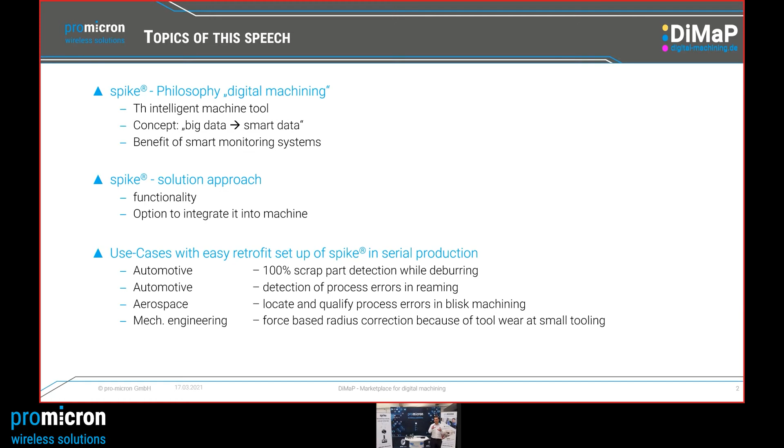The main topic of that speech will be four use cases where we have implemented Spike in serial production easily, with different machine connection opportunities. Let's start with the concept, with our idea, with our understanding of an intelligent machine.

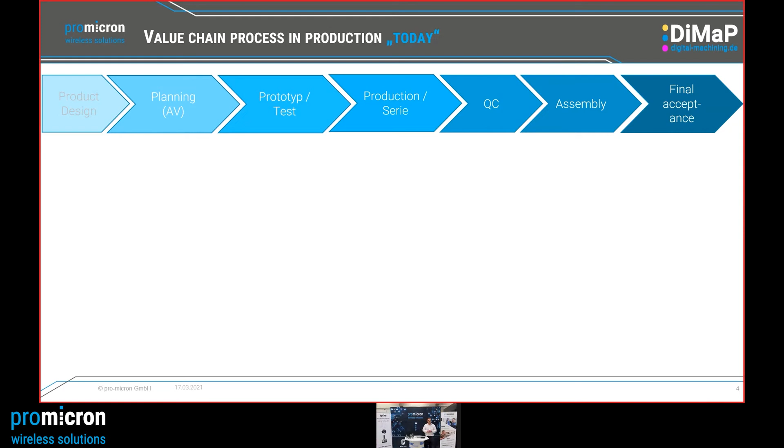And the second point from our CTO, Dr. Wunderlich, is that with the features of Spike, we push monitoring into a new level. This is our goal, this is our motivation, and how we do that, I would like to explain to you now in more detail.

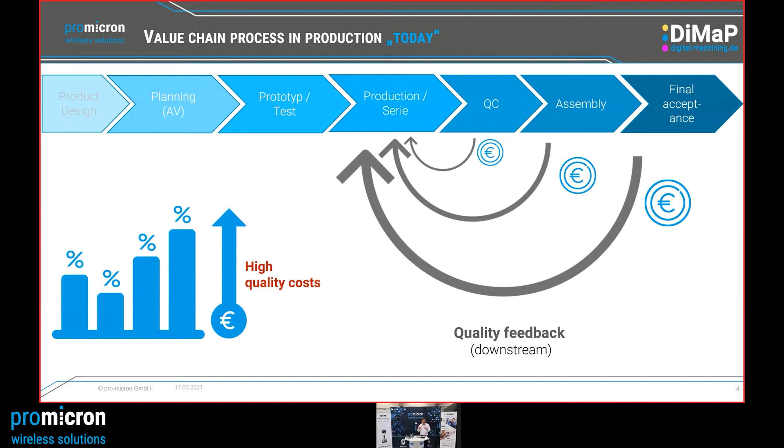This slide shows the value chain process in production today. If you have a problem in production and don't identify the error until a later step, it will cost more and more. At the end, you might have huge costs that could have been detected or prevented directly in the process. Our main goal is to face these high quality costs and reduce them.

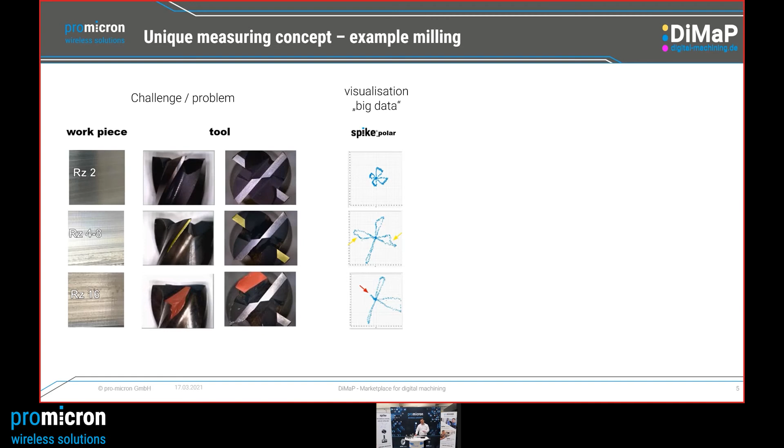With Spike, we can now measure the forces directly in the process. We can visualize the forces on each cutting edge. Because of this innovation and feature of Spike, we can detect machining errors in the process. But detection or visualization is not enough - we want to translate the big data we have into smart data so we can reach automated reactions.

In our smart software, called the Tool Control Center software, we use the Spike KPIs. If I have this smart algorithm, I just need a function like an M command or a digital signal to transfer that to the machine in order to get a reaction - machine stop, change the tool, or activate the part sorter.

This is our concept: by detecting the forces in the process, we can identify machining errors which lead to bad quality. And because we have this directly in the process, we don't need to do it afterwards with extra costs.

Now I have a concrete question for you: do you have similar problems like tool wear in your production? Let me explain some other examples, some other challenges. In turning, we have to keep the tolerances to have the right dimensions - it's a critical issue. In drilling, we face the problem of drill deflection or drill breakage. Do you have similar cases like this?

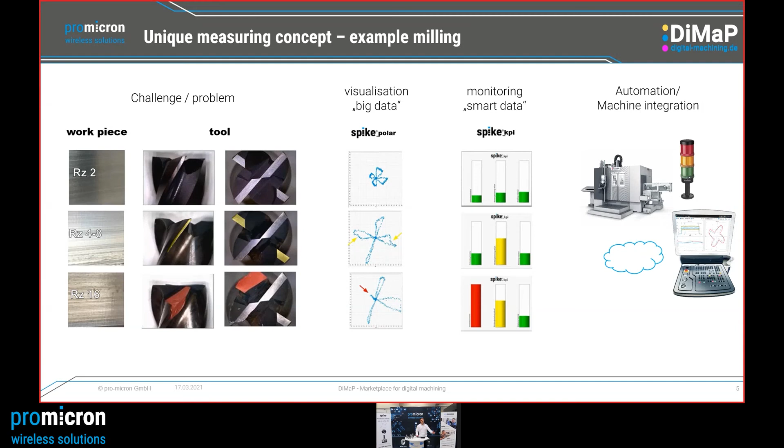Here again, just 2 examples. The high volume production - I got feedback from them that it's completely enough if they detect and sort out scrap parts automatically. This is the main purpose, a use case we would like to solve in mass production: to detect scrap parts directly in the process and sort them out automatically.

In high value production, it's a little bit different. Here we have huge parts and long time machining processes. The benefit we gain here is that we can locate, qualify, and document process errors via a digital twin directly in the process.

If we have this feature of inline process quality control, that means we can also use the tool to its full end of tool lifetime, because we always know if we assure the right quality.

One feature we provide here is the force-based tool change. If we know how much load the tool can handle, we could even increase productivity, again with assured quality, by optimizing the process parameters, putting more load on it but reducing process time, or using adaptive process control, or even by knowing my machine can handle much more load, I can push it a little bit more to gain and increase productivity.

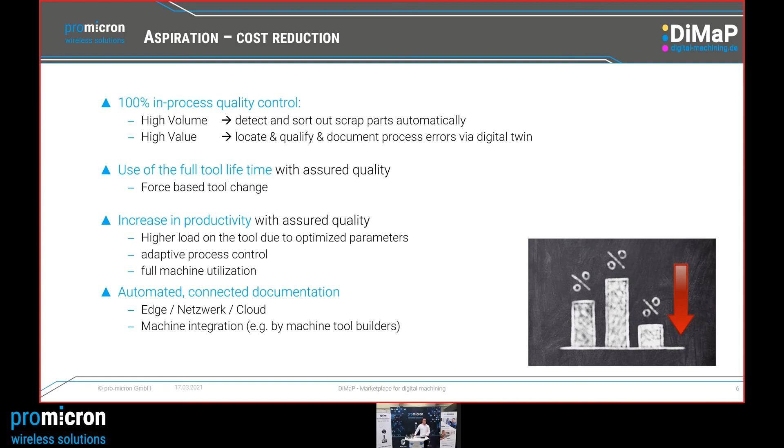Let's explain how Spike works and what are the opportunities to integrate it into your machine. With this slide, I would like to show you how simple the concept of Spike and digital machining is.

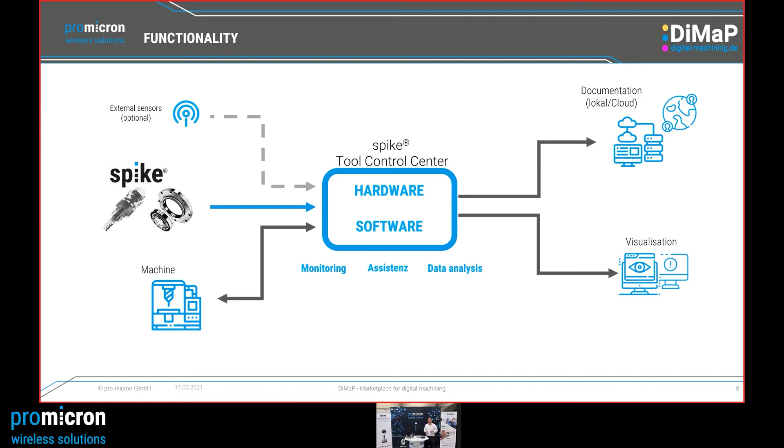We only need hardware and software to visualize and detect the forces provided by the different sensors. For example, the Spike holder, the Spike in spindle, or even machine data and external sensor data can be provided in the Tool Control Center software. It's a smart system for monitoring, assistance, and data analysis. And sure, this can be integrated and used for documentation into the cloud and visualization.

Which kind of sensor options do we have? Probably you know the indirect measurement of the spindle load. These are powerful monitoring systems already placed in mass production. They monitor the torsion signal in production. They are fully integrated, but they also have limits, for example in detecting small forces.

This is one opportunity. Next to that, we now have with Spike the direct force measurement opportunity at the tool. We have two solutions: Spike Mobile, a process-oriented retrofit solution with different sensitivities, or if you buy a new machine or retrofit a complete new spindle, the in-spindle solution, for example from DMG Mori and Grob, two machine tool builders already ready with a solution like this, providing a machine-integrated Spike system.

The benefit of these sensors is you can combine them. So if you have a Spike in spindle machine and a small process with small forces, you could also add the Spike Mobile. If you already have an existing spindle load system for mass production but cannot detect the deburring operation, for example, just retrofit the Spike Mobile, combine it with the existing spindle load system, and here we reach a cost-efficient retrofit solution.

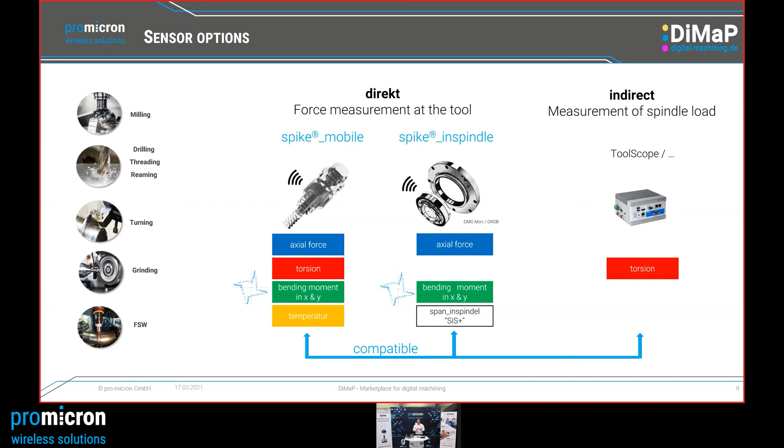We can use Spike in milling, drilling, threading, reaming, turning, grinding, and friction stir welding.

Which kind of opportunities do we have to integrate it? There are many, but these are the main ones we are focusing on, because they have different features for different benefits.

The connection with analog or digital is, for example, a connection possibility to have a really quick communication between external systems or between the Spike system and the machine. We use that, for example, for simple reactions. If you want to stop the machine or activate a part sorter, this connection is completely enough. By digital in, you can stop the measurement automatically, and by digital output you could give a signal to the machine to activate the part sorter because this is a scrap part.

If you need real-time connection in order to control the process or share information in real time, then we focus on the Profibus connection. The disadvantage here is every machine is probably different, and you need individual protocols, and sometimes you even need to integrate the machine tool builder into the project, which is another party we would like to reduce the effort of. But if you want the quick real-time connection, we could also do Profibus.

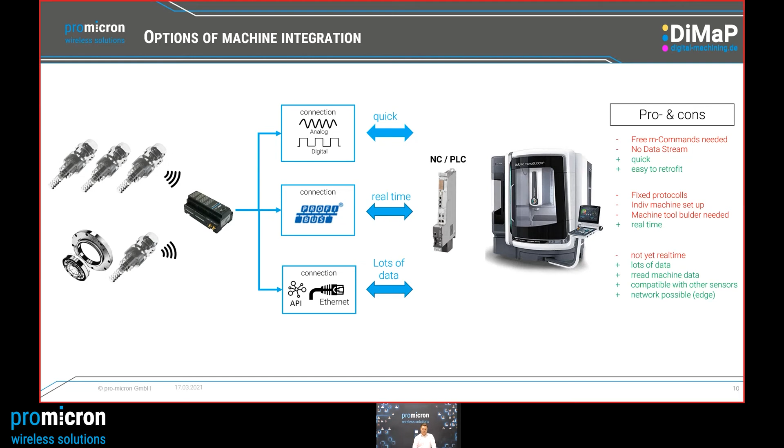Let's go directly into the use cases, into the main topic of that speech. I will start with the automotive example where we had a 100% scrap part detection while deburring.

You see here the Stama machine park, the machine line. It's mass production, millions of parts per year, always the same process. The process we are talking about is a deburring process.

Here in this case, the customer has used the high performance Heule tool. It's an expensive tool, but the process safety is high. And with this process, we were able to face and solve specific challenges, because it might happen that there are sporadic mistakes and the process itself has very low forces.

So the consequence is that the end customer needed to have 100% quality check downstream, because he was not able to identify the problem, a sporadic mistake in the process. So visual check downstream, which leads to high costs.

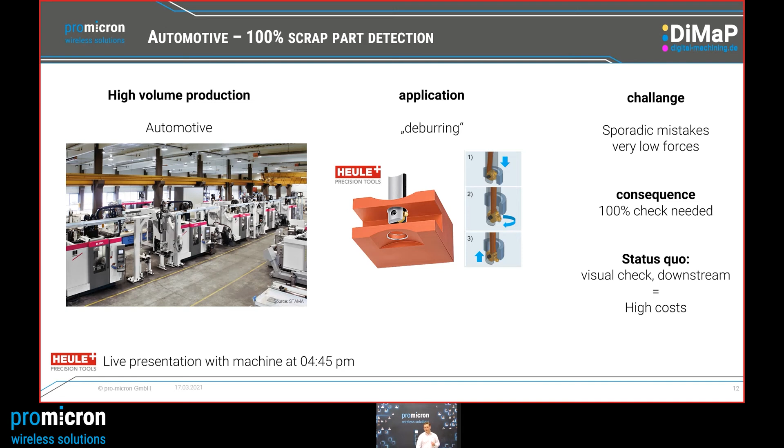By the way, later at 4:45 p.m., you will see that tool from Heule live in action with Spike, and it gives you another more live impression.

How did we solve that problem? We used Spike, a Spike mobile tool holder. We have designed a specific customized holder for that application. We produced 300 of them because we implemented that in a project for 90 machines worldwide.

And here we have found a solution, a perfect solution with the company REGO-FIX. So high performance clamping system or tool holder performance in combination with Spike Mobile was the exact right solution to detect the forces of the deburring process, which happen here in production.

And you see it's 1 Newton meter. It's really not a lot. But what was the monitoring point here? The customer just needed to see and to detect, did the deburring process happen, yes or no?

So the monitoring software knew, which you can see on the right side, how the progress goes or how the forces are increasing. If it's too high in the beginning or if the forces is too low, we have 2 opportunities to send a signal from our software to the machine as an alert, and the part sorter will be activated automatically to say, this is the scrap part, put it away.

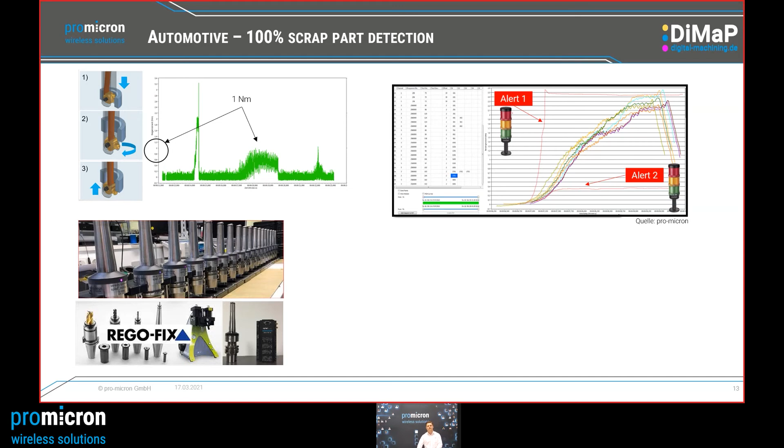You don't need 100% quality inspection anymore.

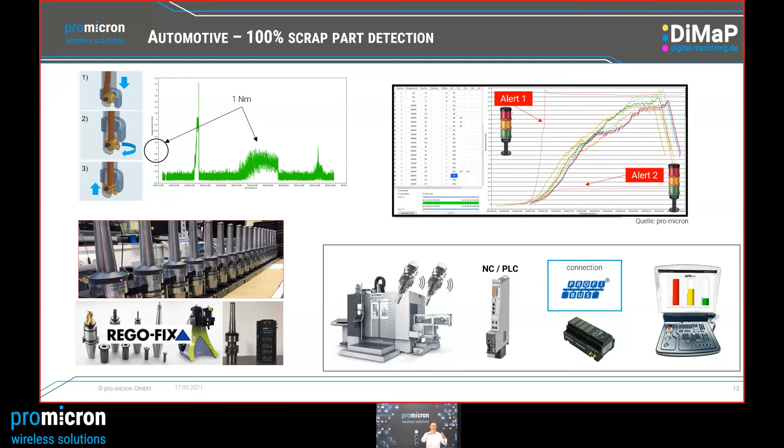Which connection did we use here? Since we were not using the tool control center software as the monitoring solution, because we were using an existing monitoring solution from the spindle load, which was already on the machine, we did not want to get rid of that. We just retrofitted the Spike features. We combined these 2 solutions, and we did this via the Profibus connection.

The next example is a little bit more special because we have an online guest, Mr. Bauer. Thank you very much for joining that event, for being online. I hope we can hear you, we can see you. Yes, I can see you in the screen.

Hello to Mr. Bauer, a process engineer for innovation at the company Alois Berger in Wertach, an automotive production company. Hello, Mr. Riele. Hello, everybody. In this example, we are manufacturing rings with 2 meters diameter on a milling turning center.

The challenge here is tools wear out, but forces are very low. 126 bores are made in 1 ring, during which we cannot measure the tools, and we change too early for safety. But the tool can suddenly break in the process. We know that if the tool wears, slight scores will appear in the fit. This is the moment in the process when it's clear that the tool could soon break. If the break happened, we would damage the component and have high follow-up costs.

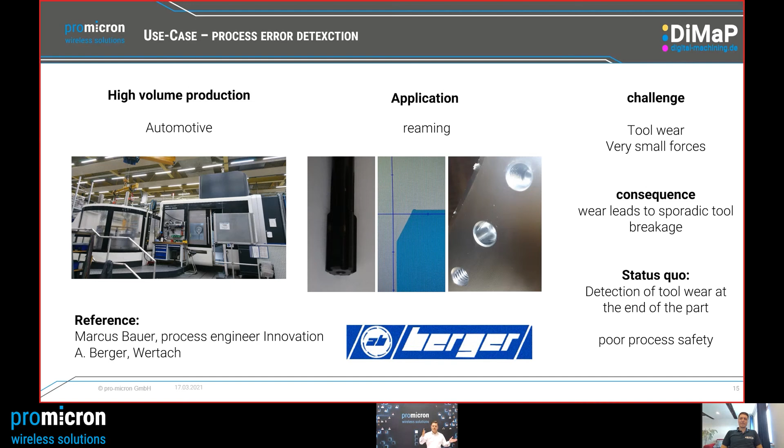So for you in mass production, it would be beneficial to know when these marks happen, when the critical tool wear starts within the operation of 126 holes. I think we have this picture again on the left side.

We see here this huge ring. What's the diameter of the ring? 2 meters? 2 meters, yes, okay.

So we machine 126 operations. During these operations, the tool can wear out and suddenly break. This is something we need to know before the tool breaks. And as we can see here in the picture on the right, Mr. Bauer, which system are you using to detect these issues?

We use the Spike mobile system. We retrofit it on the machine, and with the sensitive spike, even the forces of reaming can be recorded. In the picture, we can see how a new tool looks compared to a worn-out tool that produces grooves.

So you just said you selected Spike Mobile since the existing systems couldn't detect these forces. And we are here talking about 1.6 Newton meters. That's pretty low.

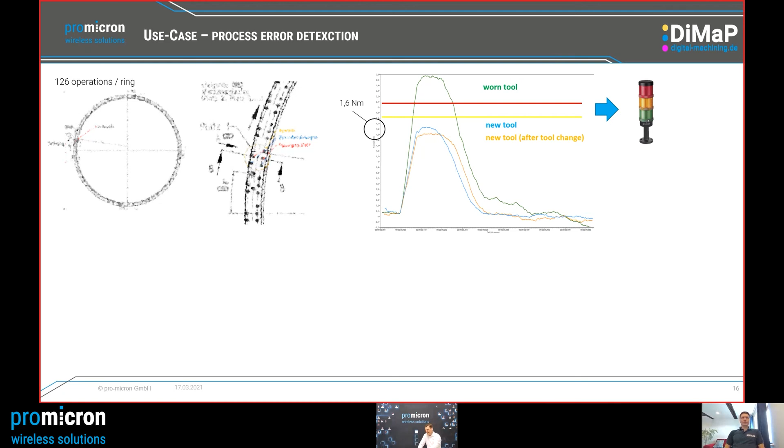Yes, of course. And I'm showing here the solution you have picked. Why did you use the analog or digital M command connection and not Ethernet or Profibus?

We are using the free M commands with a warning lamp via digital output signal, so the machine user doesn't have to stay on the machine and start to record. The starting of records is done in the machine with M commands.

You mentioned one important point straight in the beginning. You have used the M commands which are already available on the machine, so you did not have a high effort to implement the Spike system. You are just taking these free M commands from the PLC, put in the 2 cables in order to activate, start, and stop the measurement.

And if you have an M command or digital in signal, you can even have a digital output with a traffic light. So you use the most simple machine connection because the purpose was just a warning. You don't need it to control the machine. There's no data stream, just warning.

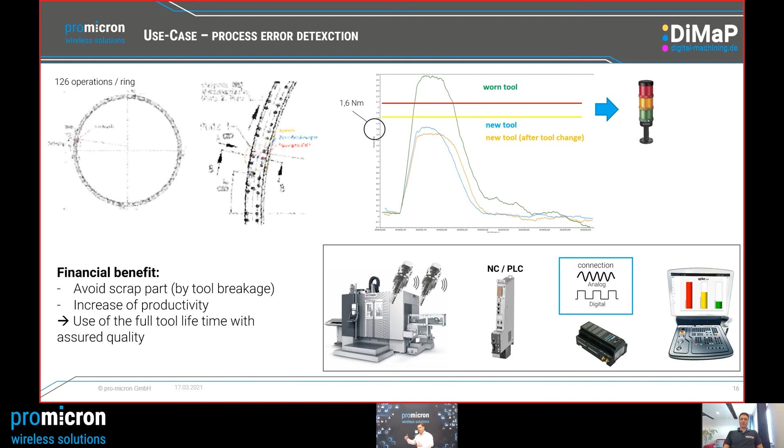Very good. Yes, thank you very much for that reference, for that feedback. It was interesting to work out that case with you because we are happy that Spike could help you avoid scrap parts. Spike helps you get more process safety, and you can even use the tool to its end of tool lifetime because you know exactly when the tool reaches a wear limit, which makes bad quality. Thank you very much for joining that event. Thank you.

Let's go into another example. Now we are talking about aerospace. And as I told you before, in aerospace you have long time machining operations. You have critical machining operations, which also have high quality and documentation requirements.

Here I have this example. It's a blisk machining example. This part we machined yesterday on our DMG machine here in our tech center. And as this slide says, the challenge is process errors with low cutting forces, which need to be detected.

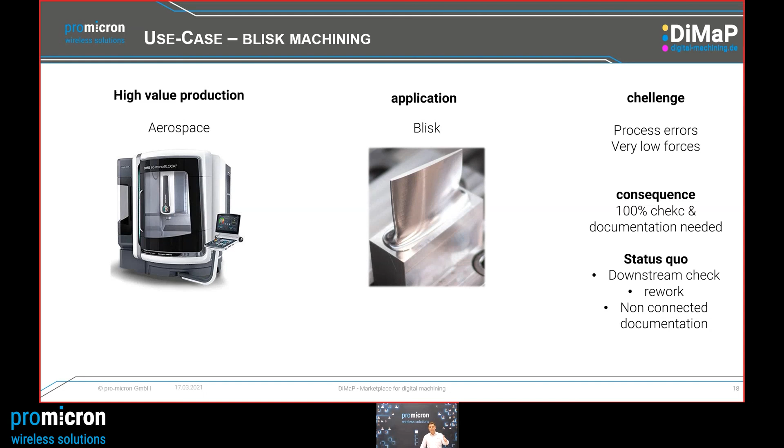Since we might have process errors, the consequence is we need a 100% quality check and 100% documentation is needed. Currently, the industry is telling us in mass production, they have a downstream check, they maybe need to rework the part, and there's no connected documentation. The solution with Spike looks different.

Here we record with a sensitive spike holder. We can detect the forces in the machining operation. And since we have a smart machine connection via Ethernet, we can read out the machine data, the axis position of the machine. With this function, in this use case, we can provide you a digital twin. And here I have a little video which we recorded yesterday.

So a short video, since we don't have time to run the whole Blisk, but what you can see here is the machining operation itself. This is what the machinist sees, but at the same time he gets now the digital twin with different colors. The colors represent different force levels, and because of the force level, we can have a direct link to the surface quality: too high, too much material, too low material, chattering, tool wear, and so on. So the documentation is done now digitally, and he can reduce his costs.

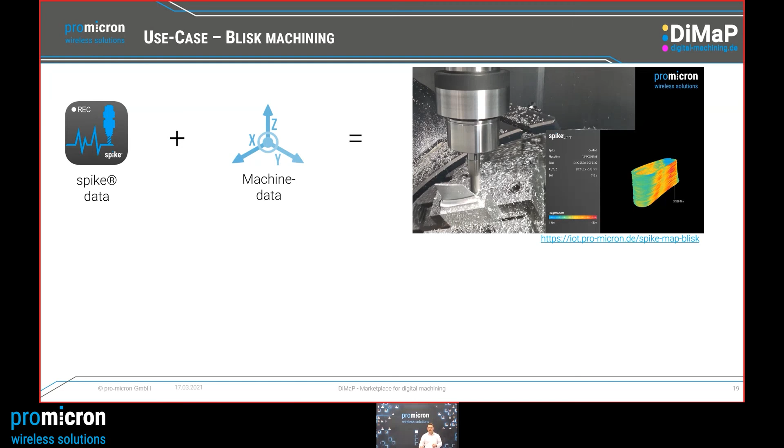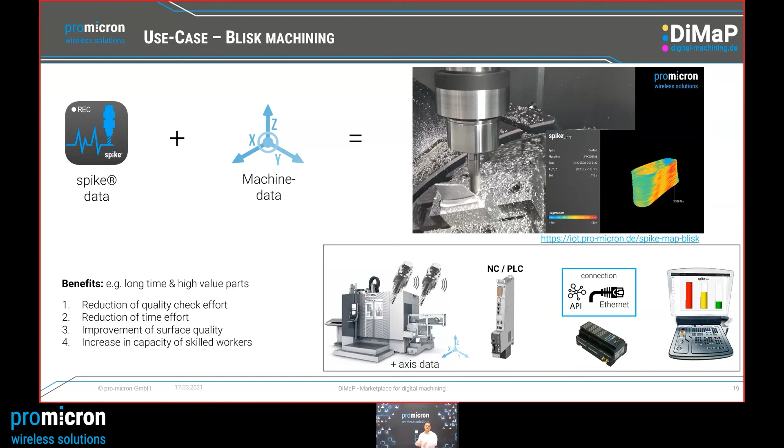I said we use the Ethernet connection. This is required because we wanted to stream the axis data from the machine into our tool control center software in order to create, with a new software tool, the spike map. Sure, we can also use the spike map for reactions, but as you know, in aerospace, machine reactions are also pretty critical. That's why we focus on quality, on the downstream quality inspection, which can now be supported with the digital twin of spike map.

Let's get into the last example. Here we have a mechanical engineering example. It's not automotive, it's not aerospace, but we are talking here about machining. And the problem is in the application of a thread milling operation with an M2.5 millimeter tool.

If the tool wears out and gets a specific tool wear level, the dimension and the radius of the thread is not in tolerance anymore. How do we detect that in production? We don't have the time to stop after every cut.

The customer where we are doing this said he is doing downstream checks, manual checks, and if he detects scrap parts, he needs to change the program manually and implement the radius correction by himself. This means high quality and production costs, which we want to reduce.

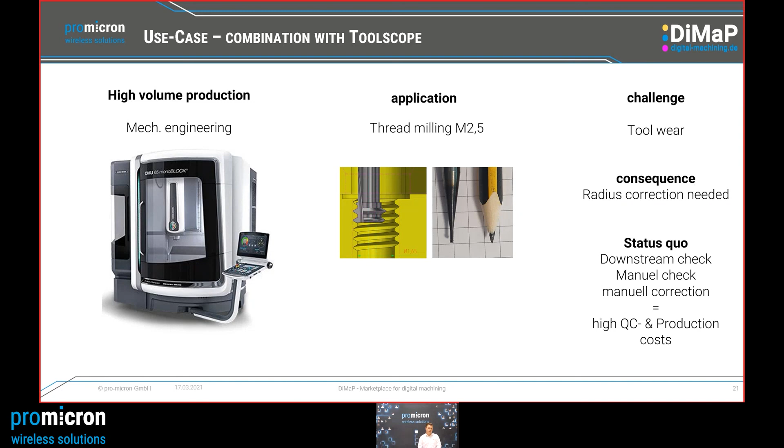How the solution looks like, you will see now. We were using the combination of an existing spindle monitoring system, toolscope, with the feature of Spike Mobile to detect the fine bending moments in this operation. Here we are talking about 0.6 Newton meters in a new cut.

You see the green graph here in the middle, and in the torsion and the axial force, the red and blue graphs, you cannot see this effect. I have prepared this comparison between a new tool and a worn tool. This is exactly what our software and our system needs to detect: when is the tool worn out with a critical tool wear so we can react?

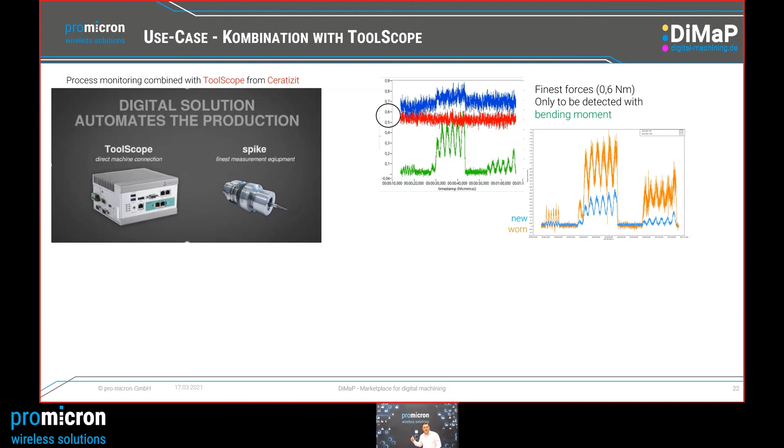Since we have the direct reaction with the toolscope, an existing system where we use the Ethernet data stream as well, we can now provide the spike data, the fine patterned bending moment, visualized in the toolscope, and the toolscope with its automation function can do an automatic radius correction.

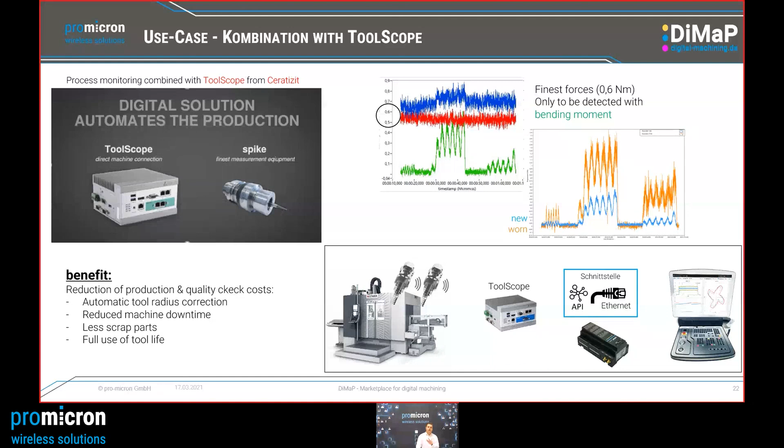For this use case, I have prepared a video which explains and visualizes that. I can show that now because the speech of toolscope, which was done an hour before, has also now been presented. This is a new launch of an opportunity of a solution, a retrofit solution between toolscope in combination with Spike.

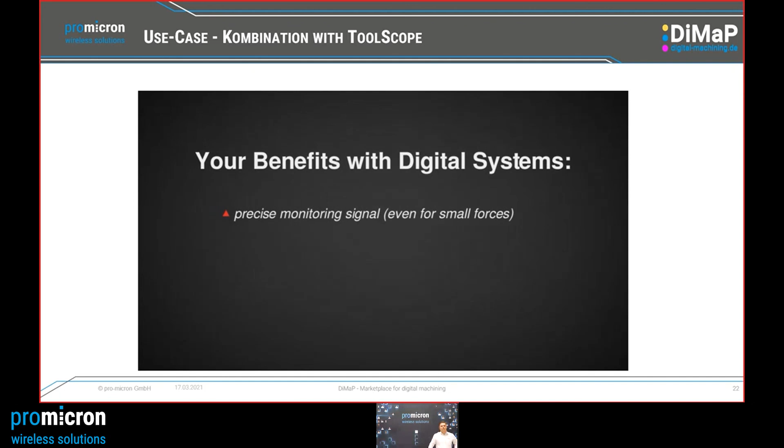So just to summarize that video again quickly: with Spike, they are now able to detect these fine forces in that threading operation. First of all, they can identify if the tool wear is too big, so they can directly start the rework action automatically. These are the two points which make this complete process more productive and cost efficient: no manual rework anymore, and automated production, time reduction, and process safety.

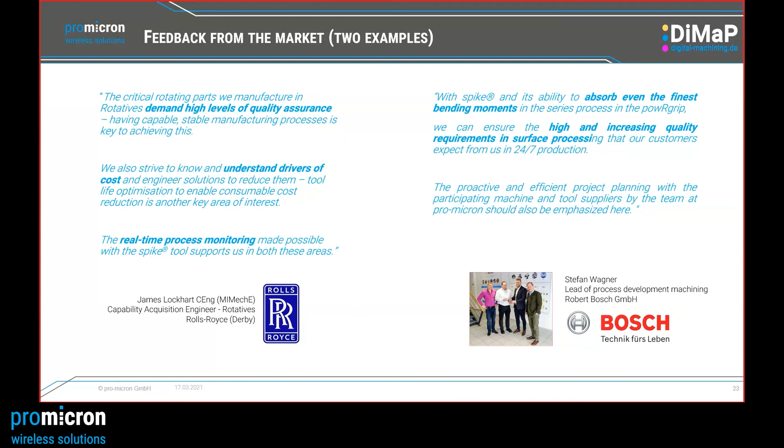On the other side, we have now again the aerospace example. In aerospace, as we said, a digital twin is used, or can be used, and we face this high demand level of quality assurance, which has high costs - high tool costs, high documentation and quality inspection costs. This is what we want to solve with real-time process monitoring, especially in blisk machining. And here the first stages of using Spike have already been implemented.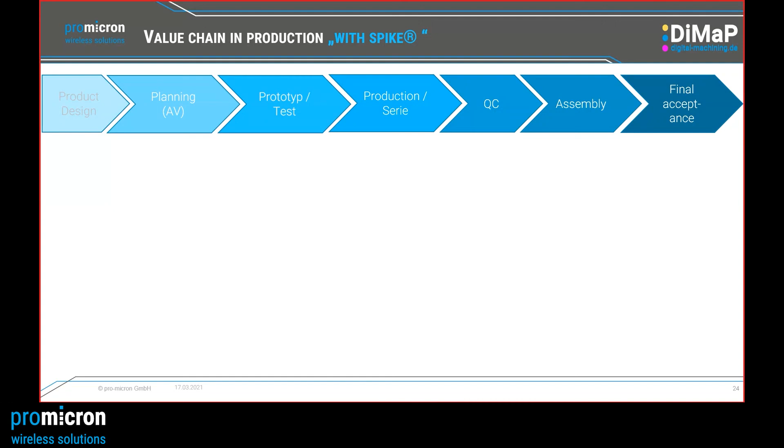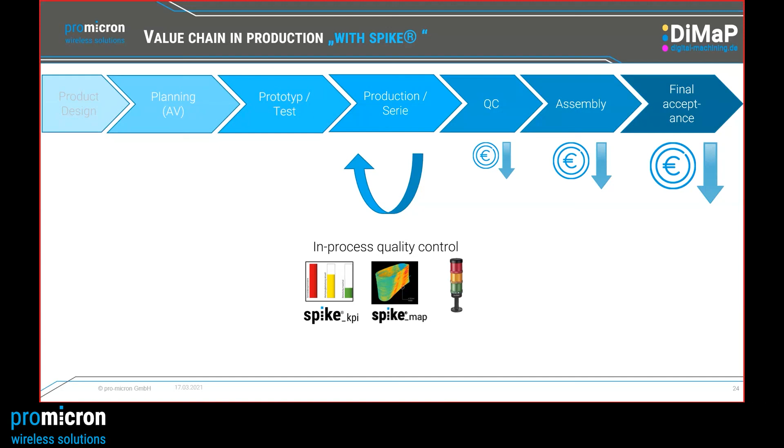Now let's go back to the value chain, which I've shown you in the beginning, from pre-production to production to quality inspection. With Spike, we can now do in-process quality control. We use Spike KPIs, the Spike map, or warning functions to activate a part sorter. These are the three features you need to have in mind, to ask us for: the Spike map, monitoring via Spike KPIs, or support to identify scrap parts in process. With these features, our aim is to reduce the quality inspection costs, which are still of high value in production.

Now we have 5 to 7 minutes left for questioning. I think I have heard some notes from my colleagues already. Are there some questions, or who wants to be first with a question noted during the speech? I'm free now to answer your questions.

So we had one a little bit earlier asking to confirm how Spike acts as a tool to enable the tool scope system to be more sensitive, and maybe just to expand a little bit more on that from your discussions.

I would say yes in a first point, if it's related to the force level. But there are more features. For example, with the Spike Polar via the spindle load, you cannot detect or visualize the forces on each cutting edge. That's another benefit which comes from the Spike system, from measuring the bending moment, which can be added to the tool scope system or to spindle monitoring systems. They are good for process monitoring and process safety.

Did the process happen, yes or no, for the higher forces? Now with Spike, we have the opportunity to retrofit that solution to make it more sensitive, or to even get more smart information into the program. If a spindle monitoring system is already available, it's a very cost-efficient solution to just retrofit the sensory holder and not the complete monitoring system. So we use existing equipment to find a very cost-efficient solution.